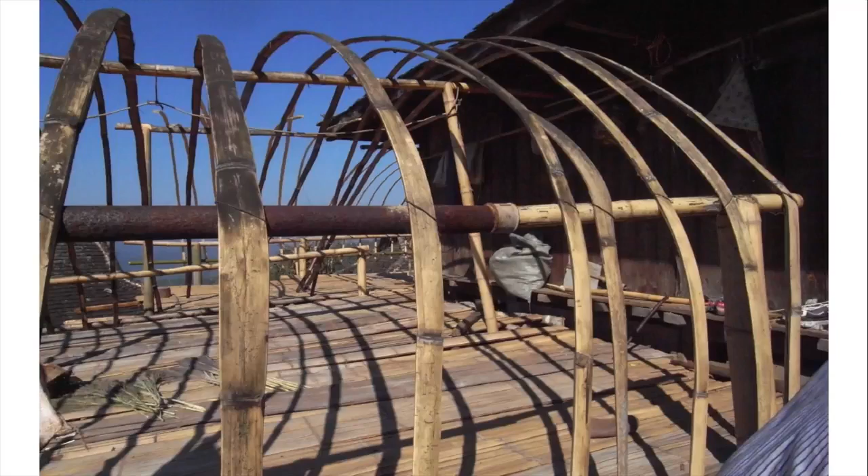That cladding surface there is actually a bamboo that's been split and fanned out. A close-up of the bamboo. At the back, this is the peg sort of structure through. And this is one of the balconies that you would come out into a sun deck. Those decks, the floor is very uneven, and that's only just a small thin layer of bamboo to step out onto. So it's a good thing these people are quite light.

This is a flooring for the hotel, woven bamboo again. A preparation of baijiu, I guess. They're the gourds in the area. The construction of that deck, you can see it's pretty light. That's the hay. These are the trees in the area. It's very similar to Avatar. The trees' roots just go on forever and sometimes stretch across the road.

Outdoor living is very simple, quite beautiful, just raw, easy lifestyle there. They do have issues of alcoholism, and it's in the Golden Triangle. It used to be the old Golden Triangle, so there's some drug issues too. But

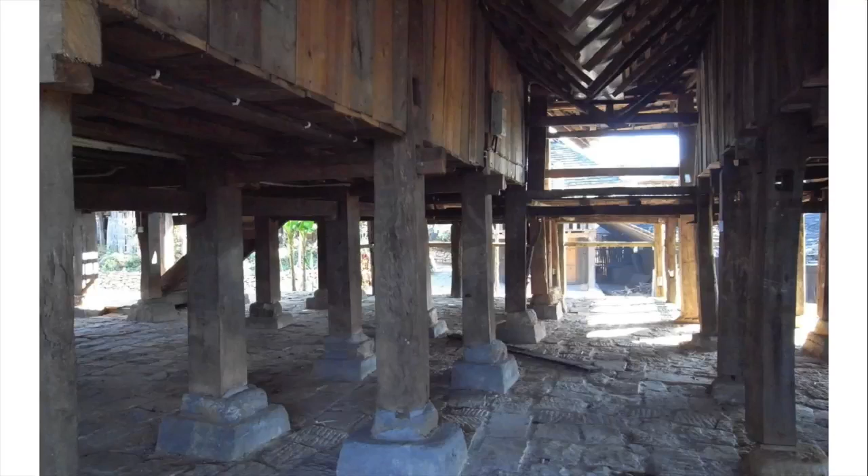So one of the things that we felt about the Wa people was that they're facing the sort of issues that the Aboriginal people are here in Australia, and that they're getting a little bit railroaded by the majority people, the Han people in China, and people are coming in and telling them what they should be doing, and you see that there's a high level actually of alcoholism and poor health. The villages, if you go far enough into the hinterland, are very poor.

Our pictures are maybe romanticising a little bit what they have, but the poorest are dirt poor. It happens that they're in a pretty good climate, so shelter from the rain is the main thing. Heating and cooling is not such a problem.

But anyway, so coming from Australia, we felt this strong, if you like, affinity with them, and we were hoping not to participate in the exploitation of their culture or the bamboozlement of their culture, and often that is happening.

Another sad reality for the area is a lot of the culturally specific places of significance for the tribes are being taken for hotel developments and other residential repurposing, and the locals are going in for what they see as the last days enjoying the site before it's privatised.

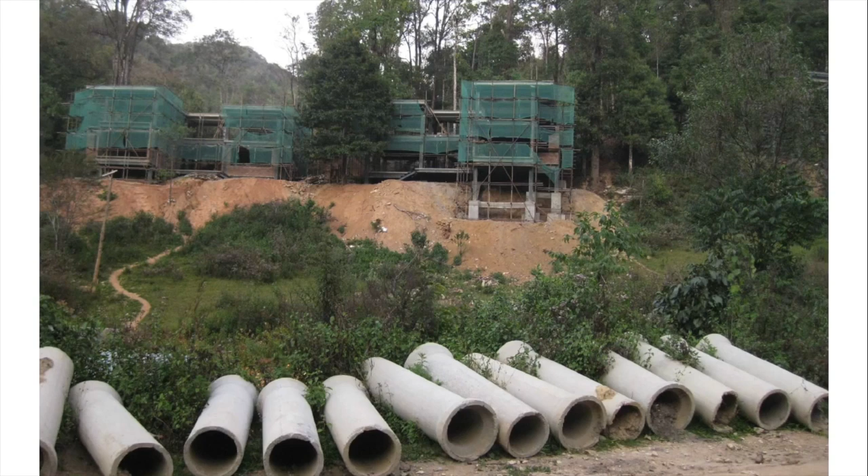And it's very sad to see their way of taking over the site is to, not intentionally trash it, but they have a difficulty understanding the issues of pollution and rubbish. And if you think of America back in the 60s, Yunnan is undergoing the same sort of adjustments to their society.

Not long ago, they didn't have any plastic bottles and other snack food and waste products that wouldn't degrade naturally. If we were walking along the road, there'd be a guy selling a kind of mushroom mobile on the street that's just basically threaded mushrooms held together by a stick. There's no plastic bag, and this sort of hyper-modernisation is a little bit difficult to deal with, and I think the China government is eventually going to come around to the issue of recycling, but it will take some time.

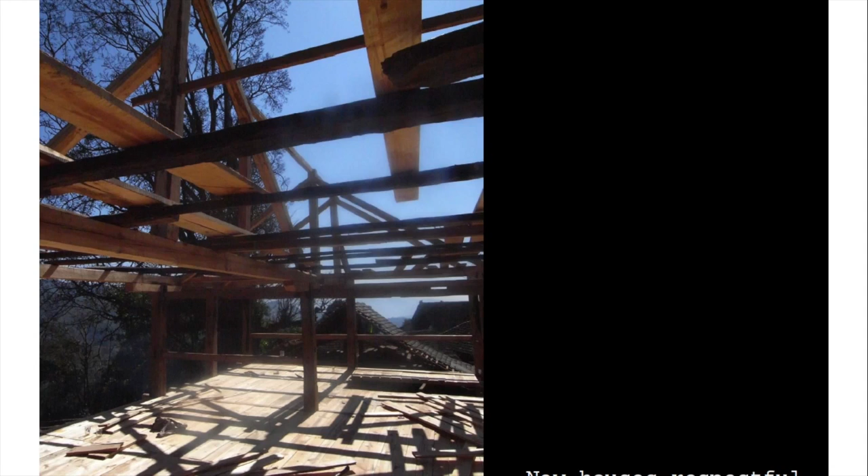One of the interesting things about working in a place like this, and with the idea that we're trying to find a genuine Wa tradition, is that we weren't there for long enough, and what we saw, what we were taken to, were often not Wa buildings, and there are about six different ethnic groups in this particular area. And actually over time, in the last maybe 20 or 30 years, their buildings have started to look similar.

So it is a real issue, with that sort of intent of trying to be genuine, how you can sort out what makes the Wa tradition different from the Dai tradition, different from the Bulang tradition, or whoever else happens to be around, and they fuse together. As Sara said, the roofs used to all be thatched with rice, the leftover husks from rice, but all of that's changed, and very few of them now are doing it that way.

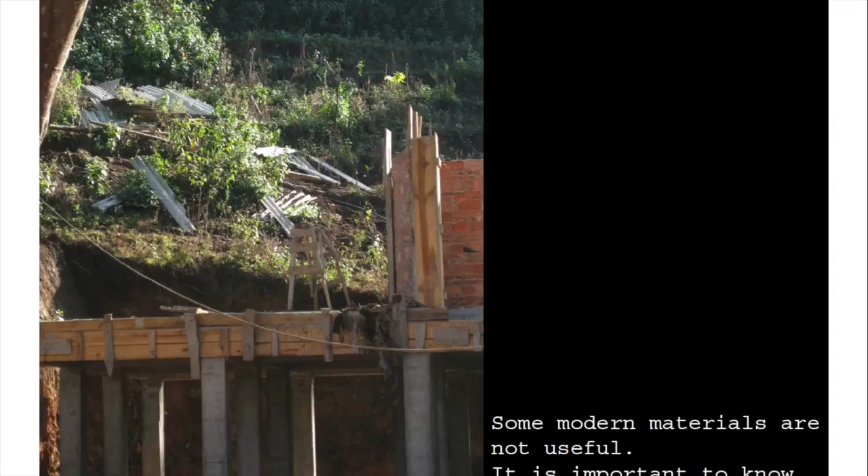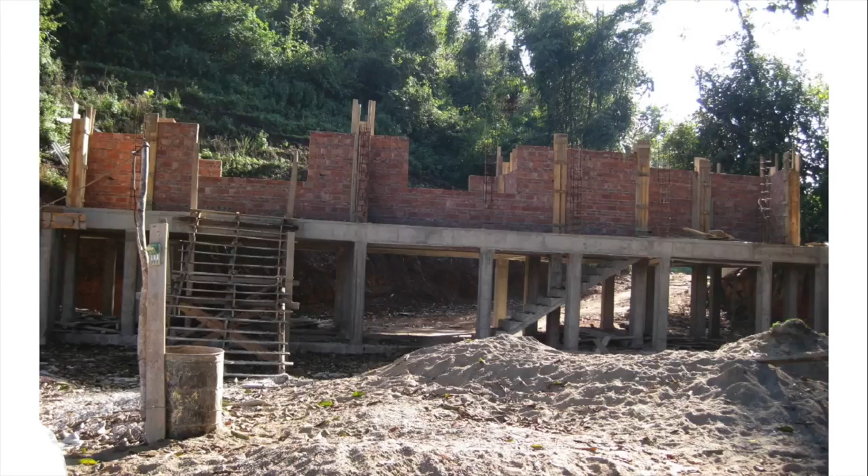But the government has come up with this great idea of using pressed aluminium pieces about that long that have fingers on them, and if you lay them over the top, they look from a far distance like an aluminium copy of a thatched roof. They look pretty shitty. That's not the way we see forward. It's better to accept that there needs to be change in that, and try and keep the substance, rather than trying to ape something that can't be aped unless you actually do it as thatch.

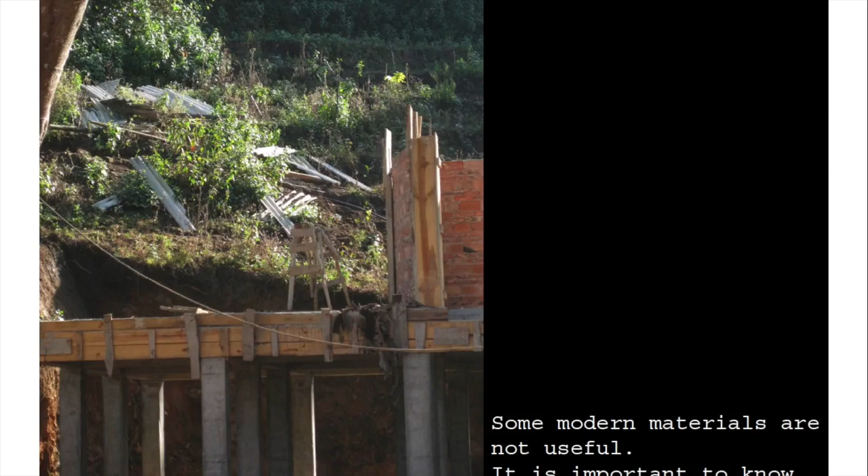These pictures here are trying to illustrate some asbestos problems. They're still digging asbestos in Yunnan because the government makes a lot of money from it, so they're not going to stop. And we tried to send out some information to the client to educate the locals on the dangers of asbestos, and it's a very difficult and tricky issue because the government is so interconnected with all the developments, and they have their industry to support themselves. So in many ways it's going to be tricky to try to curb the government's enthusiasm for making money.

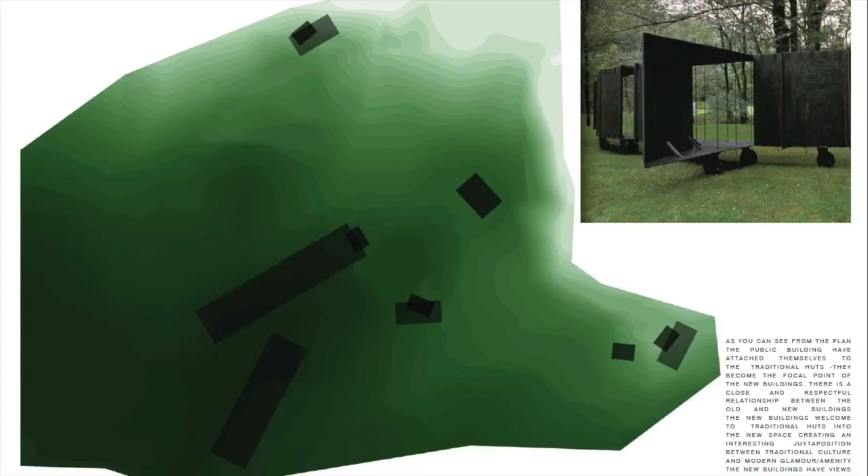And these were the original council buildings that were falling down, unfortunately, and had a lot of timber rot in them. Our intention was to keep some of them and add to that, but it was difficult to convince the government and the client to do that because the buildings were in such bad condition. But we borrowed from the language to recreate them.

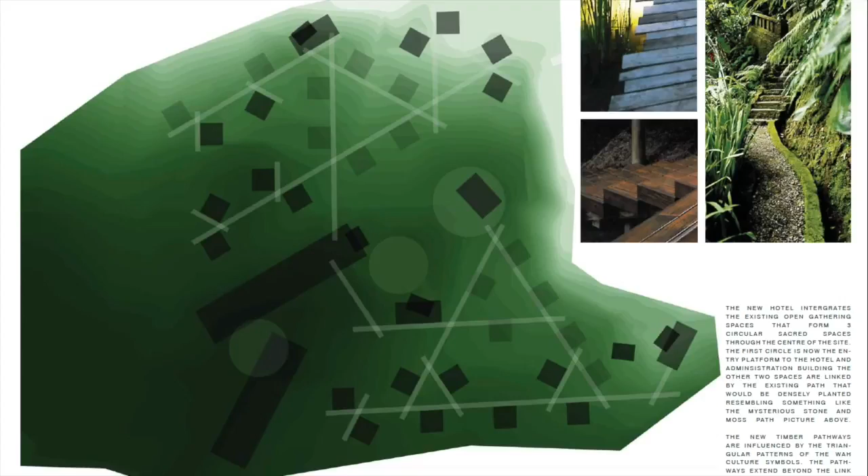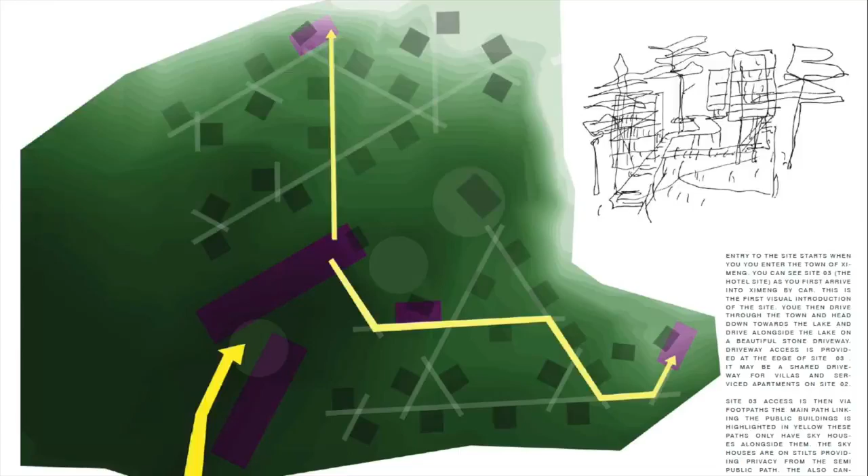So the positioning of these huts is basically a kind of treehouse aesthetic, so pass through the landscape to individual houses and allow the landscape to run underneath those houses up on poles, as you saw through the village, and be connected through the main buildings, but also be part of the landscape and looking through the trees at all times. This was a very early scheme, and it had multiple iterations, eventually found its form.

This is an entry into what we conceived as the village square, and is in one of the main corridor buildings to the left, across the creek there. Water is very, very important to Chinese. It's a symbol of wealth and prosperity, so there had to be a bridge building. And also the gate building through to kind of formalise the square arrangement to give people that sense of security

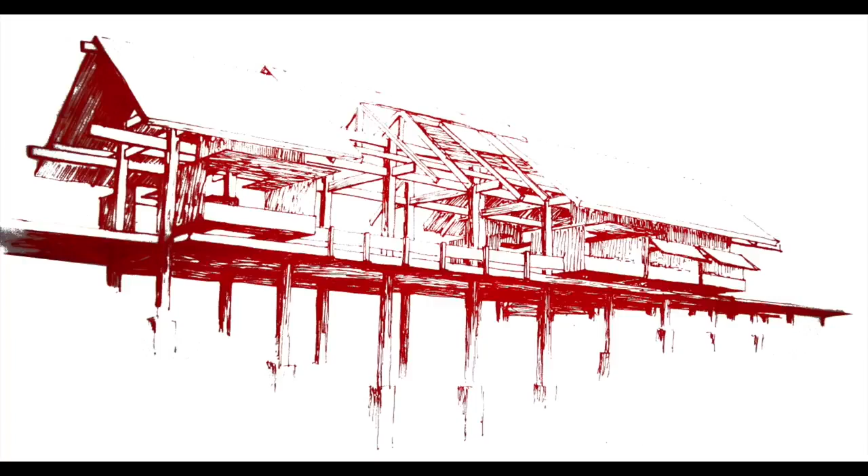This is the corridor building across the creek there. It's all timber construction, borrowing from the Wa language that's set up. A lot of the through beams through the columns are established as a modern sort of language. That's the gatehouse coming through. This is the meeting hall.

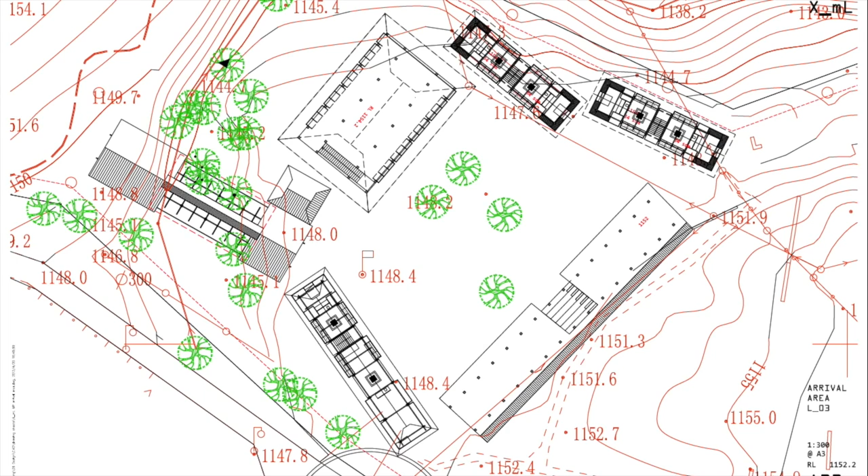So just going back to this is the arrival point around here, and the buildings are deliberately organised to form like a village gathering place and a place for ceremonies. So as Sara was referring to before, each year they pull a log along, which has religious significance, and they kill a chicken, and they pull it through the town. It's become a tourist attraction now.

Instead of happening once a year, it happens every feast day, or whenever the Han Chinese are down in sufficient numbers, they organise another log to be pulled along. But they usually use the same log now. There's too many trees. Yeah. Don't worry about the trees. It's the same log. But we organised this to save all of the trees.

One of the features of this, which is not exactly architecture, but all of the trees of any significance were kept all over the site, and that was possibly one of our greatest victories in this project, to the point where they are now saying they see this as a big thing for themselves, and in fact are saying it was their idea all along, which is good.

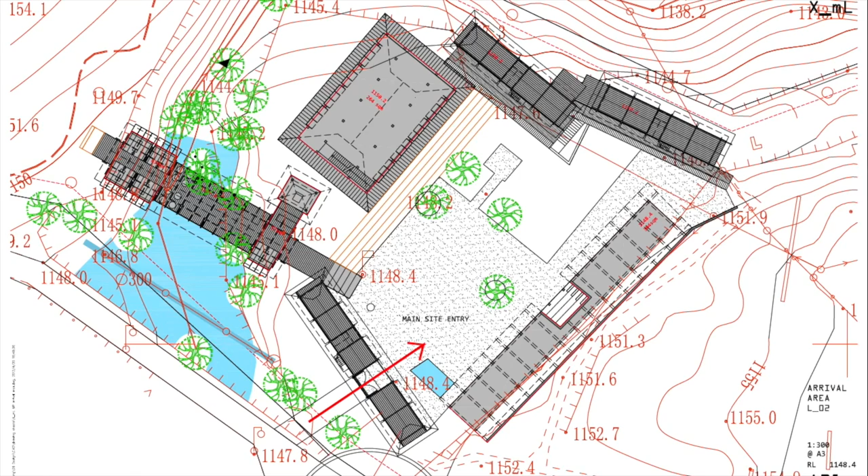So these are the buildings that ring around and give the scale to this central space. We also have the town not far away. This is a very heavily forested site, but it's not that far from the town. And so we organised the buildings in such a way that they would shield the view, because it's supposed to be the feeling that you're a long way away, that you're in the countryside, and unfortunately the sounds do get here, but the building mass has made it feel quite isolated.

And the landscape, we wanted to introduce the rice paddies of the area, which are so prominent in the landscape, as well as the tea trees. And of course, having said that they have to have rice paddies, that means you have to farm them. So we got involved in that as well. This is the fireplace villa, which is perhaps the closest building towards the Wa aesthetic on site.

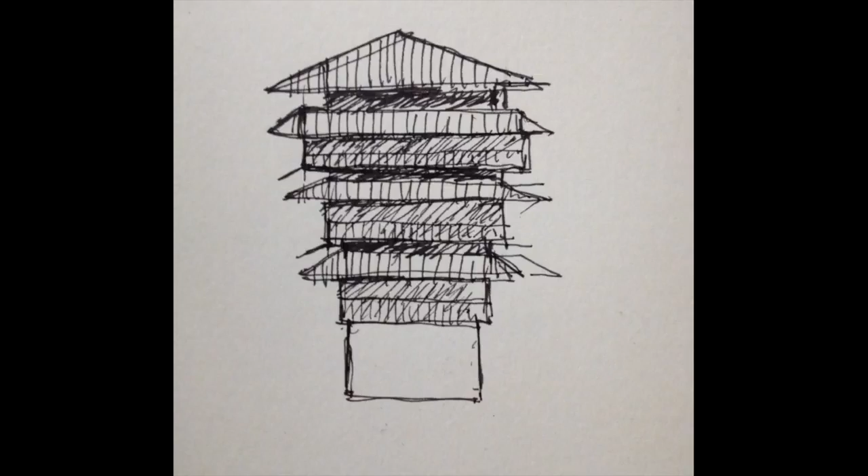It rains a lot, and we don't do pitched roofs very often, but we recognise that a pitched roof was the appropriate thing to do here, particularly for a tall building. The top floors are hanging out, the lower floors go back in, so that if you're using bamboo on the outside, which was our intention, the water doesn't get on the bamboo, doesn't rot it, and when it rains, it is torrential rain.

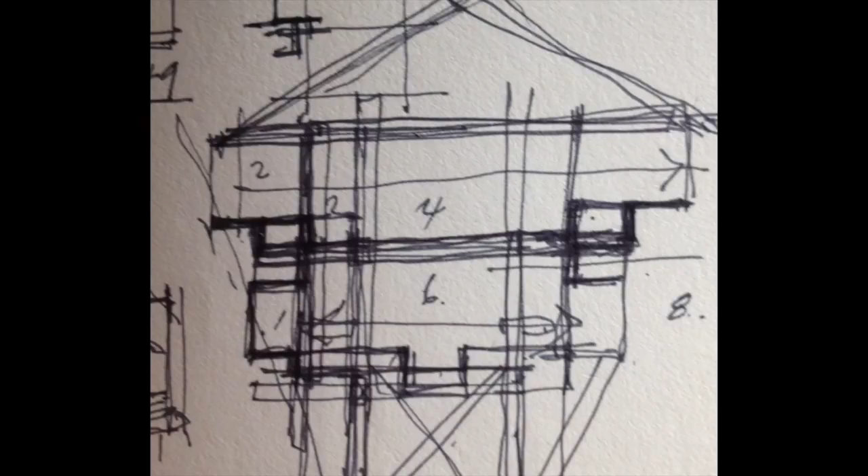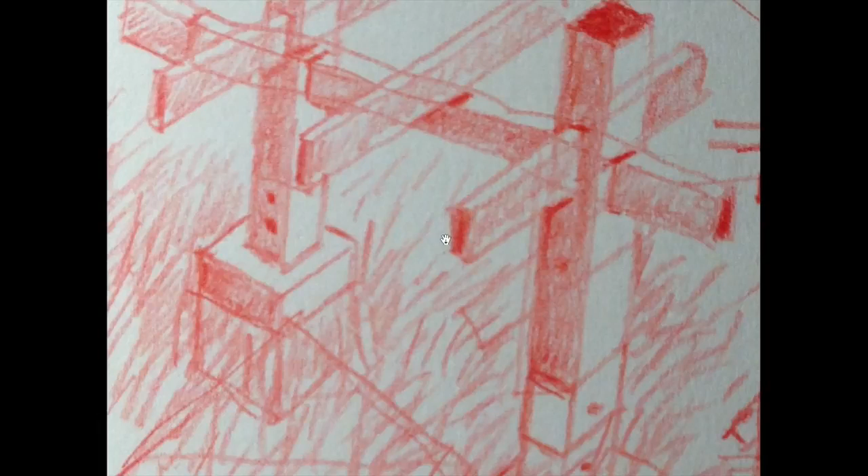Monsoon. So it has that sort of stepping down feeling, depending on how tall it is. The structure we really loved.

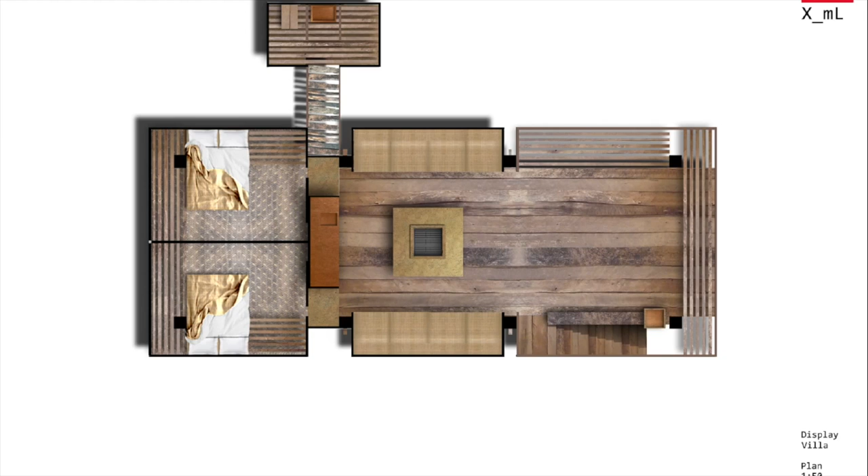This is a rendered plan with the fireplace in the middle and the beds to the outside, and an almost outdoor shower, and the seating base that you could use as sleeping single beds if you wanted to, and a big outdoor room with the wash basin outside. So connection to the outdoors was critical.

This is a small render of the space. I hope you can see the reference to the local village. That's the fireplace. And normally you would hang things to, cooking utensils and whatever, but if you were smoking something like an animal or a pig or smaller perhaps than a pig, you would put it up there, and you would sit around.

This is a little bit more deluxe than the basic at-home version, because normally you're sitting on little stools around the fireplace, and this one has a place where you can eat around it.

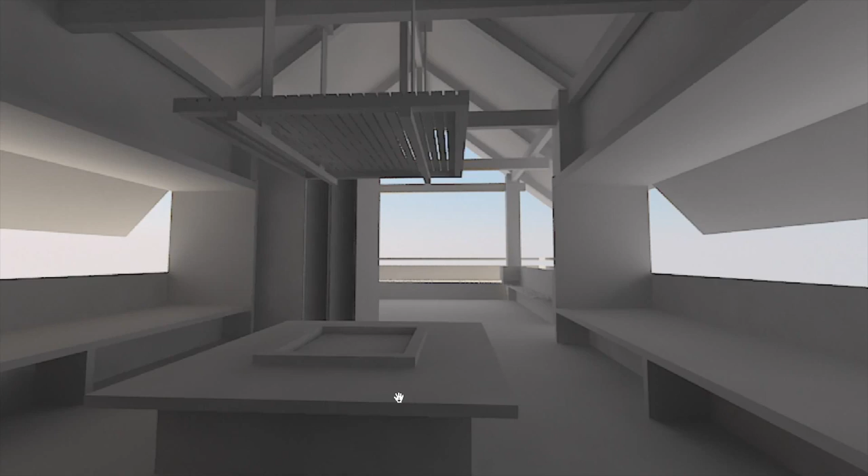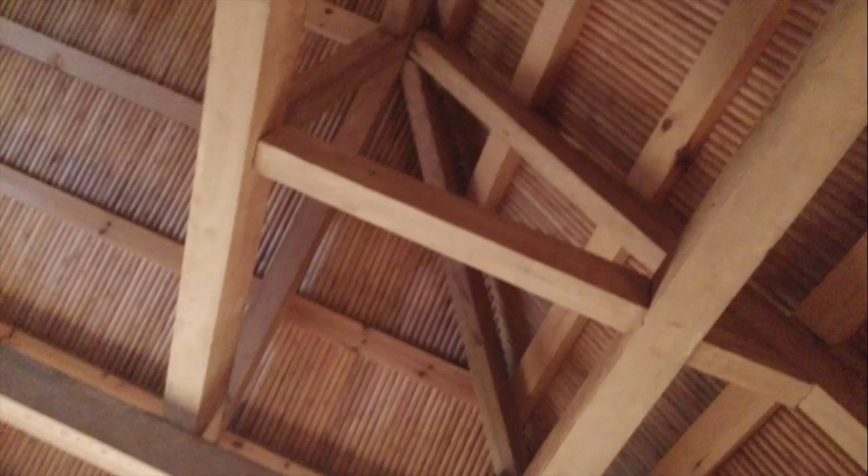Next project. So one of the things when we did these drawings as a prototype, we arrived down on the site and found that, it was a design that was meant to be a prototype, and we go down there and they've built it. They've changed quite a few things. But one of the things that they did was get these big logs, and they set up a sawmill on the site, and they were cutting them, and they were putting them up pretty much straight away in green condition.

Or if they weren't ready, they were lying them on the ground willy-nilly, all over the place, and they were becoming pretzels. So you have this beautiful timber, and it's about 240 square. It's drying badly, they're not treating it properly. The client and the builders have gone out and found people who don't really use timber that much and don't have that much of a tradition in it. Just down the road was a sawmill where they could have bought the timber, and they know how to look after it, but they didn't use them.

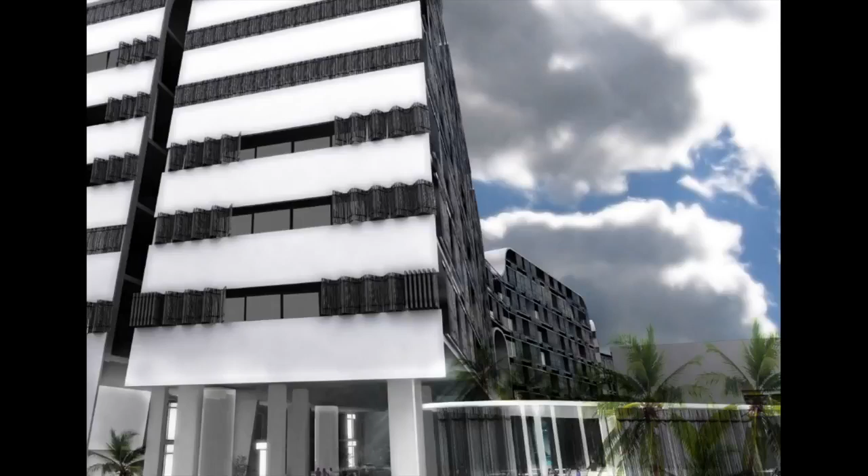We wanted the apartments, as much as possible, to try to reconnect with the landscape. So the towers have planted balconies and outdoor rooms, green roof gardens on the townhouses in front, and natural ventilation as a priority to take advantage of the natural sea breezes of the area.

This is a later version. It's not what we started off with. This one is the second version, where there were many versions because there were lots of people in the client group that were piping up at various times. It's like a political party with their factions, and some would win, get ascendancy, and then another group would get ascendancy. So it was an interesting process.

With many facade ideas. So this one was looking at a green facade, like literally having a green trellis across the building with planters that would creep across. And then there was a perforated green screen for the building to filter the harsh tropical sunlight. That's the bamboo screen facade.

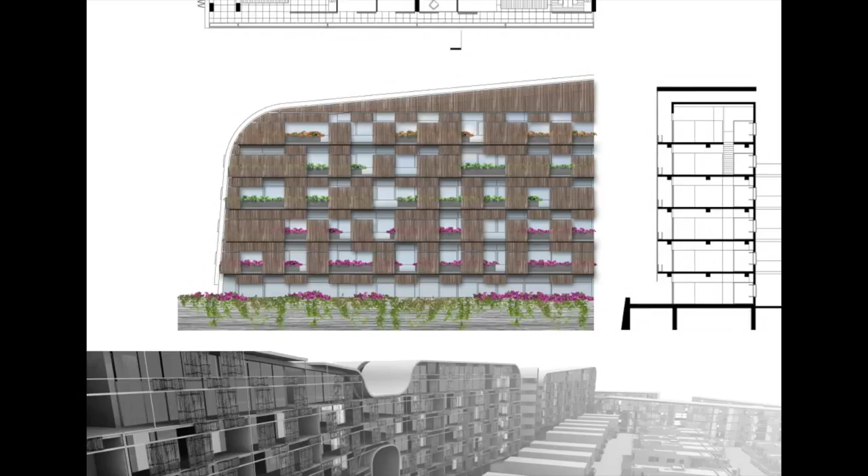You can see the depth of the building is utilising these apartments to take advantage of the natural sea breezes. They're only one apartment wide, so that allows you to naturally ventilate each house individually, and they're connected to a series of bridge links and vertical circulation points.

The standard setup in China is that you'd run an awful, stinking hot corridor along the back side of the development, with one core every 20 apartments. That's probably a bit of an exaggeration, but the cores would be hot spaces. You wouldn't be able to naturally ventilate your house because the breeze couldn't get through the apartment. So our strategy was to keep the houses narrow, allow the breeze to blow through, and make the core circulation space external.

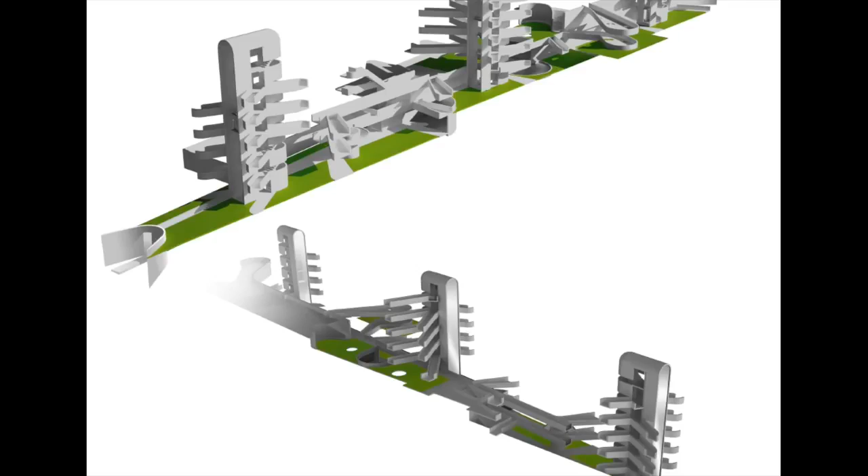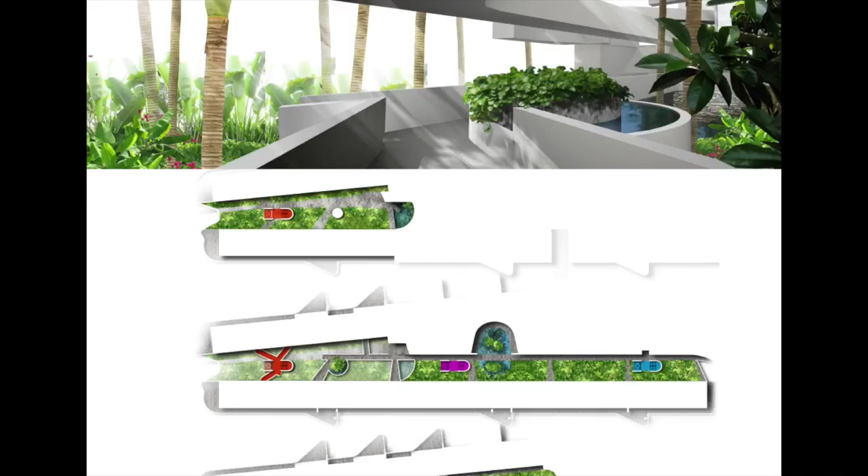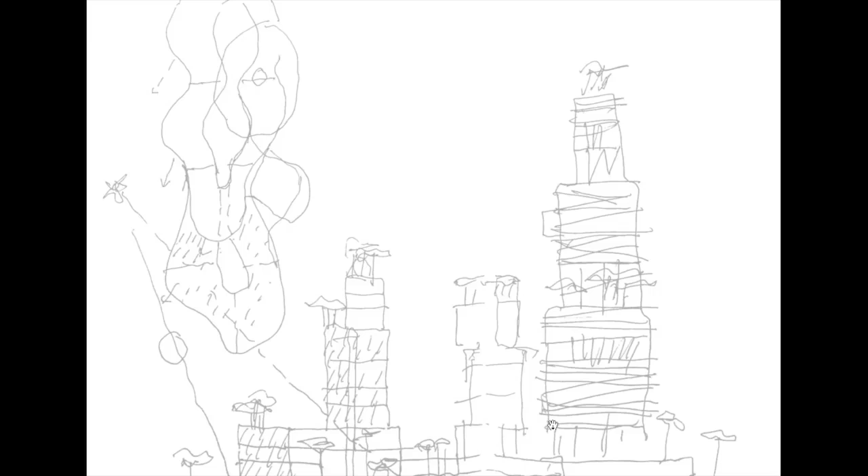These are the vertical bridge circulation points, almost like a tree in themselves. This is the outdoor external vertical circulation garden, so you experience entering your house through a vertical garden. The apartments are in lines on either side of the garden.

Initial ideas of another adaptation of the building form, heading towards those towers shown in the first slide. At some point the people next door built up until this stage - there was a 10-storey height limit, which was why they were at maximum 10 stories high.

Then the people next door, all of a sudden, started building 30 and 40 stories high. Our clients said, 'Hang on, what's going on here? This was not part of the town planning guidelines.' So they approached the government and said, 'Can we do something like this?'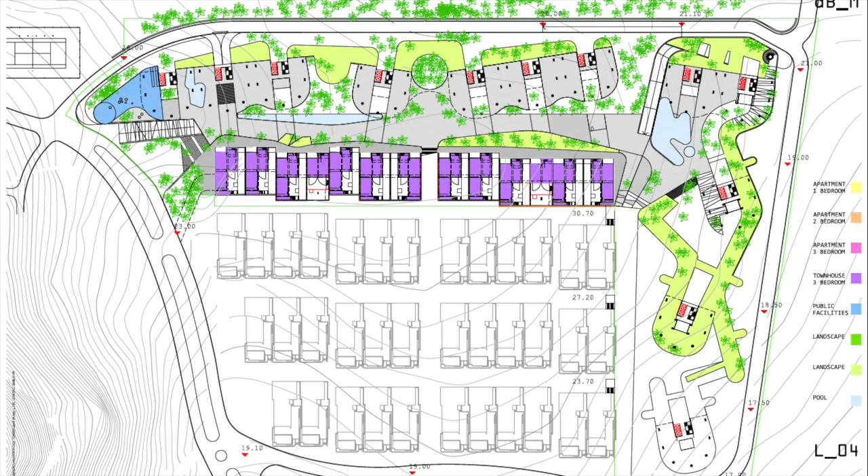This is the initial level 4 planning area. It's built on a fake hill, if you like - the sea level is further down south of this plan, and they've introduced a lot of sand to the site to create their own man-made hill, so they can build basements underneath the hill without claiming them on the GFA. It's an interesting system they've got going in China that makes things interesting to work in architecture.

These are more developed plans at a higher level, so you can see the apartments finding their true form, and the townhouses in front of them.

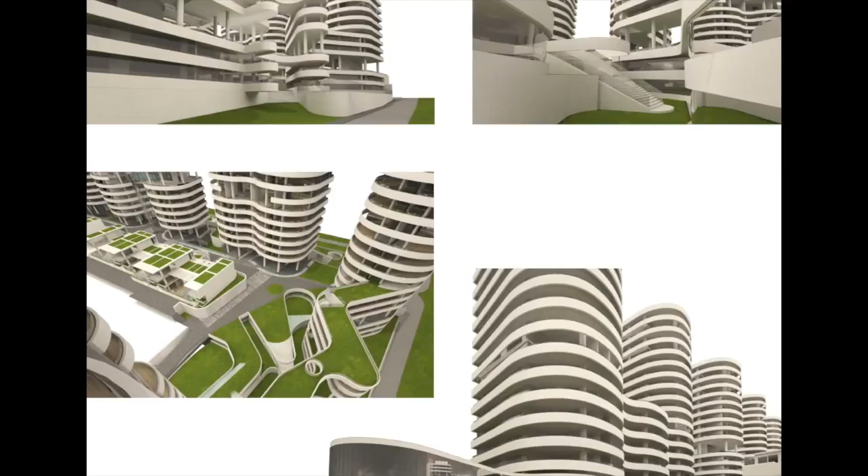There's a form study of the buildings, eventually finding those landscape planter balconies that also keep the sunshine directly off the glass facade of each house - shading the external perimeter and making those spaces quite livable inside. So you have a beachfront, fully operable facade, outdoor living rooms and the like to connect you to that perfect beach condition temperature.

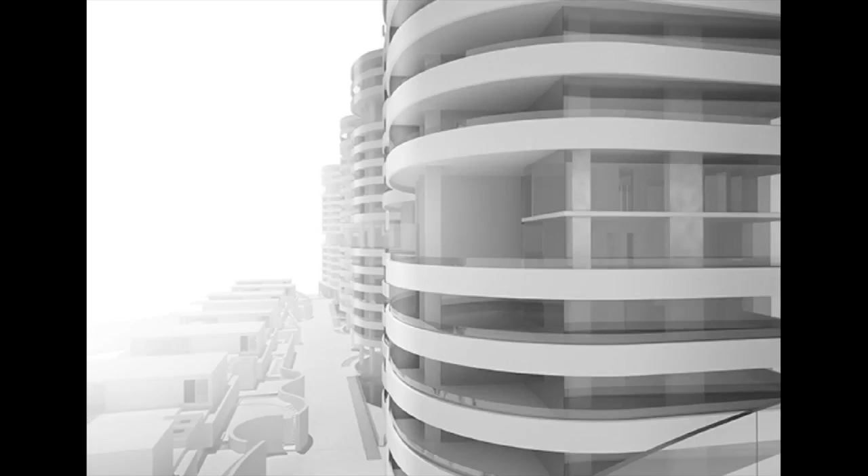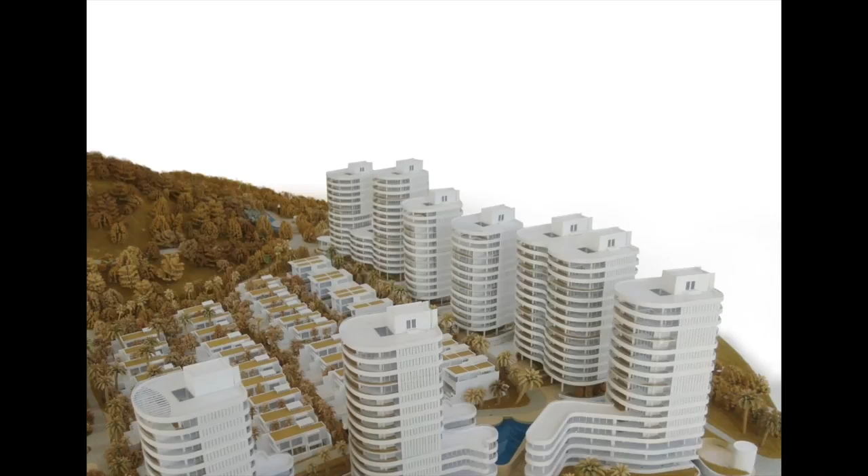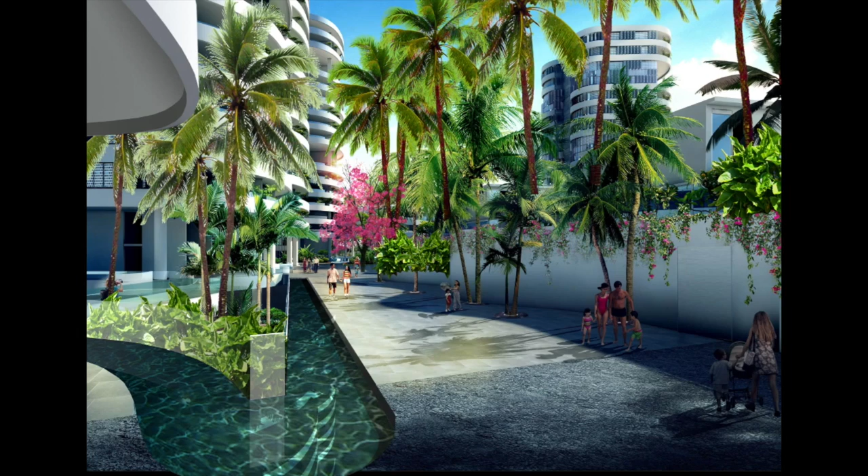A view from the balcony looking back along the apartments with those townhouses in front. The model shows walking up from the beach to your apartment. This scheme shows what were once bridge apartments through, and this is walking along the podium area with the townhouses to the right and the apartments to the left.

You can start to see a view from level 6. It isn't always 3 stories, it's 2 and 3, and you can always get a view from the 6th level down to the beach. This is an early version as well.

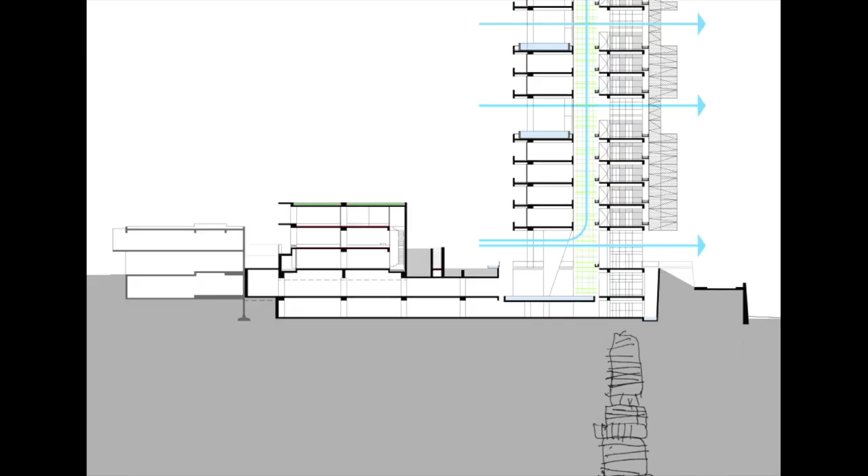Maybe it's a little bit higher than it ended up, but it has this internal atrium which is open to the bottom and the top and through, so that the air, using a Venturi effect, can suck air out of the core of the building and through the surrounding apartments. You can also see the natural ground line on the road there - imagine that line going down to the beach, all the sand that's been added to create basements out of the man-made hill, and everybody gets a view that way, so it sort of works.

So these are a couple of versions of this apartment tower. This is the atrium, and this part with the lifts and the stair is also open.

That actually had some benefits because an open space doesn't count as part of the gross floor area of the building. It only counted as 50%, which means the developer can put more apartments, more space that they can sell.

We also have pretty big balconies. These aren't little balconies - they're conceived of as the primary living areas of the place, and the doors and windows push right back so there's very little obstruction between interior and exterior. That also has advantages for the developer, because this is nominally an apartment of say 100 square metres of internal area, but it has about 30 or 40 square metres of usable balcony, and all the windows open up so each room steals more visual and functional space.

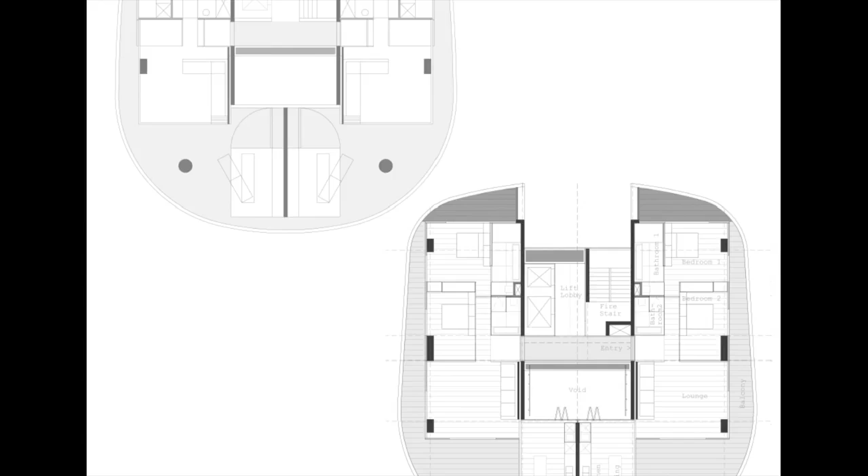This is inside one of the show display apartments. You get that sense of what it's like to be in this planted balcony wraparound space, shaded from the sunlight, but also have your garden on the 10th floor looking out to the view of the bay beyond.

We pushed very hard to have screened spaces. This room on the left side of the lounge was going to be potentially a bedroom or potentially a tatami tea room facility, but it has the capacity to be a 2-bedroom house or a very generous 1-bedroom apartment.

The interior decoration is not ours - don't blame us for that. Why we're showing this is because even though they didn't stick to our plan, it was flexible enough for other people to do their decorating and still work. It's not what we would have preferred, but it turned out okay, and it meant that what was the theory behind it actually worked quite well.

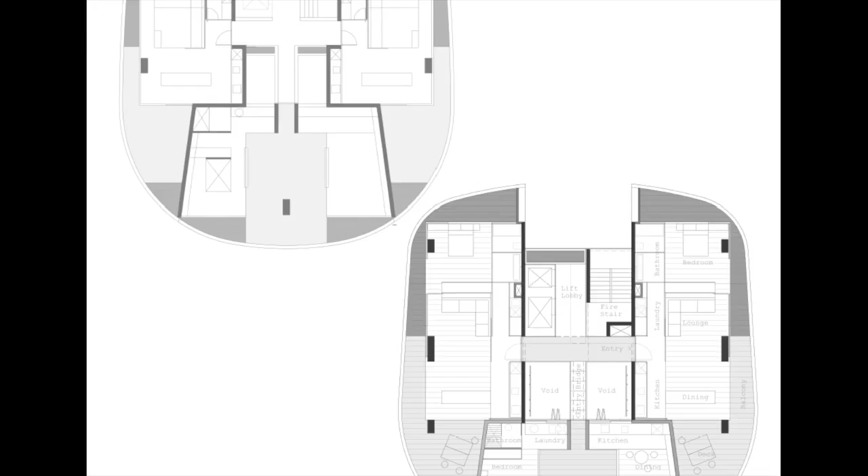The apartments behind follow a similar strategy to the pictures you saw before. This is apartment 1B at the front, so planters both sides and the external living space in the middle, and potentially you could have a fold-out bed on the other side as well, but it's a very ambiguous space - you walk through a corridor and pop out to the outside of the house before you've even gone into the house. So the view is a very dramatic effect.

This is outside balcony, so it counts as 50% of the space. It's not that clear here, but there are walls that push back behind the joinery, so the kitchen and laundry become part of the outside space, as in fact it all does. So it's either one slightly partitioned space, or these can be pulled out so they're all individual spaces.

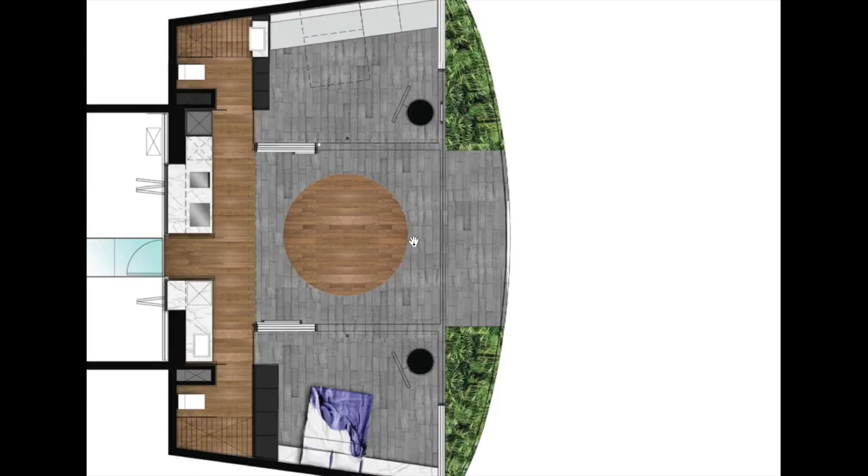Again, this isn't our design, the interiors - sorry. The planter through, the balcony in the trees.

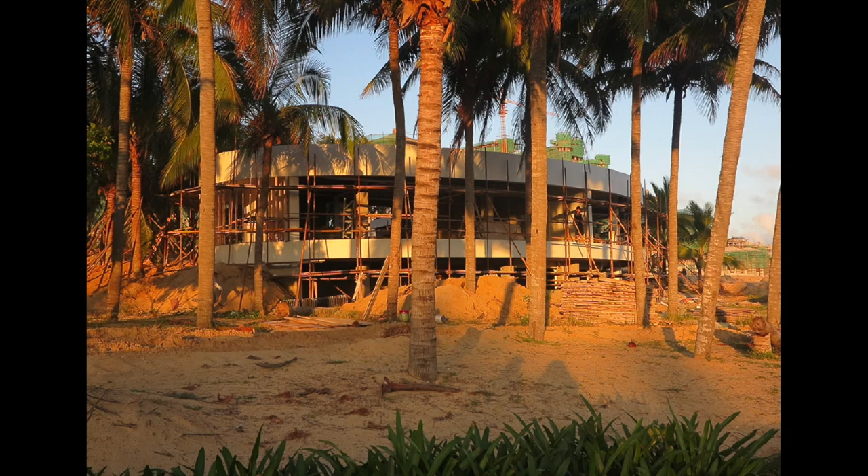The sales display suite being constructed in the early days, then finished. So those apartment interiors were in this purpose-built display structure.

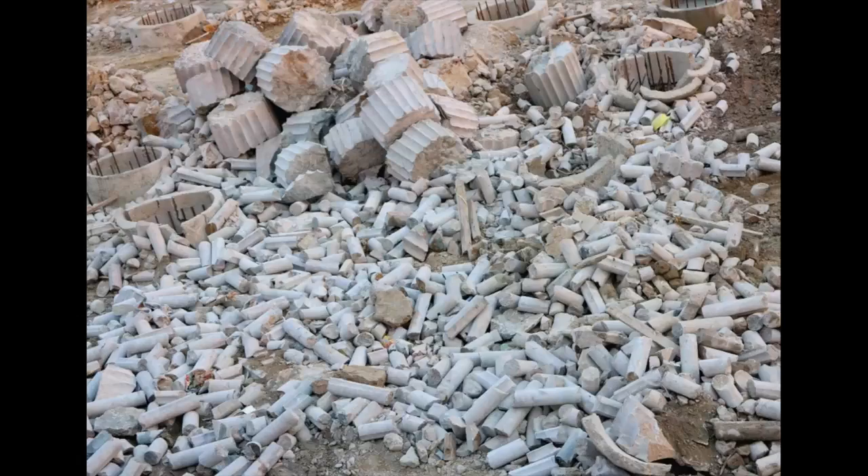This is the beginnings of the construction of the actual apartments. When we came on site, we thought it looked more like the Colosseum wreckage - they're actually core drilling these footings, and that's the effect of those sort of Doric columns. But it's very hand done.

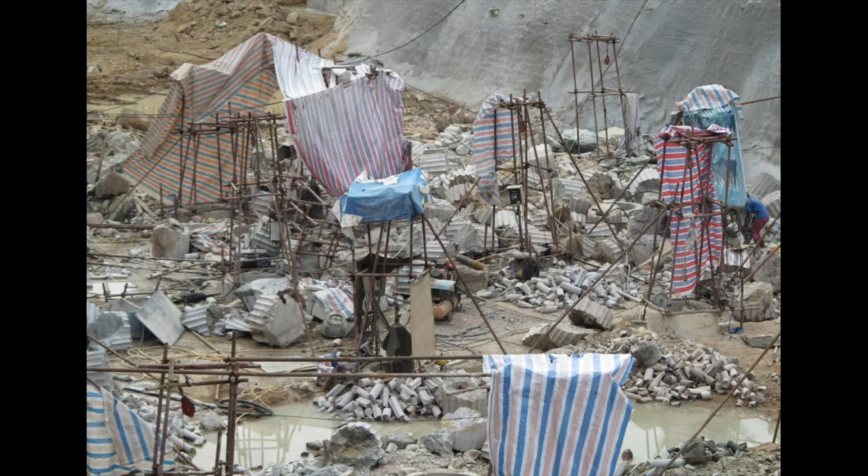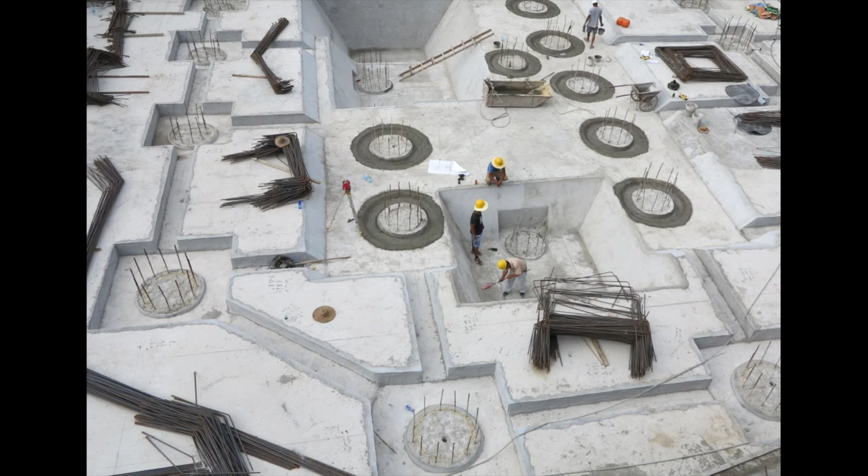This is an interesting combination of almost old world meets new world in China. You just never really expect both conditions to be running simultaneously, because next door you can see the sort of Star Wars style construction happening on site at the same time, but the difference is fairly dynamic.

Soon the scaffolding will be removed. I'm told it's going to be the end of November, but we will wait and see.

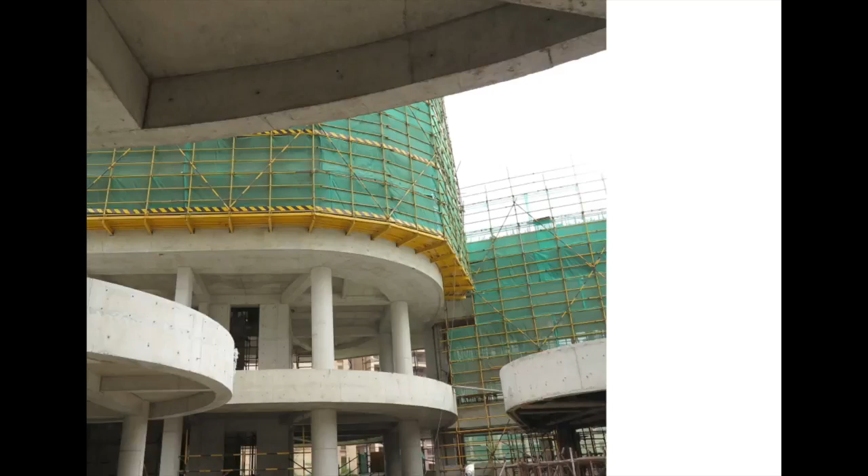This is part of the level 3 space with the level 4 in these ribbons of structure above, splitting apart to create this space. This is the tower.

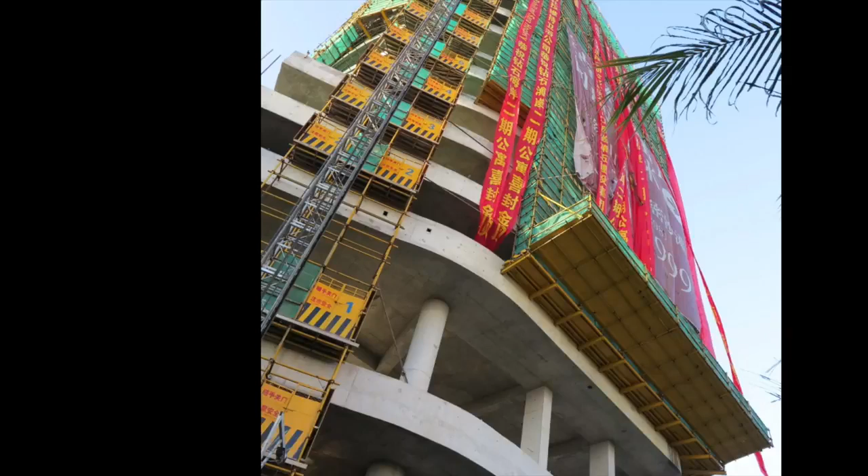When they got to the top of the tower, there's a bit of a ceremony that happens in China - they bring all the animals in, carve them up for the locals, and set off deafening fireworks. Michael set them off actually, and that goes on for a while. I'm not sure why they did it in the daytime, because fireworks are so much better at nighttime, but they certainly had the same sound effect.

This is the level 3 retail area and car park adjacent, and you can see the building forms splitting off that level 4 area to rip apart the form and bring light down to the lower areas of the building.

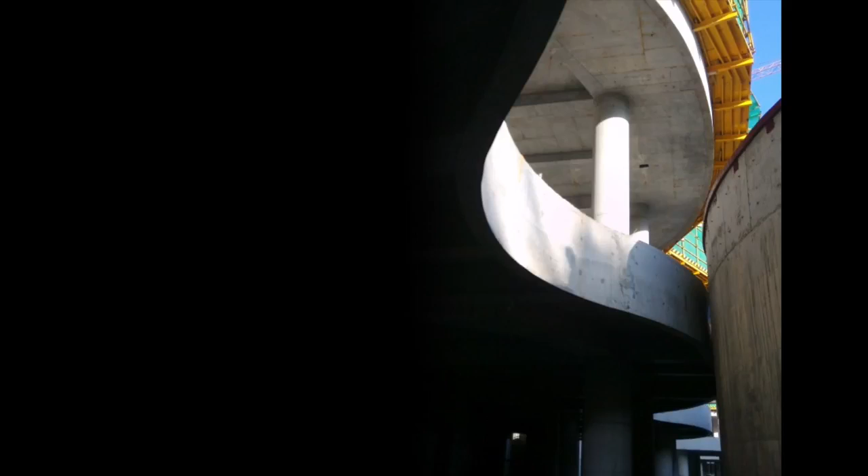That's the space we were in before. Michael's looking at it on site now, one of those sculptural spaces on the site.

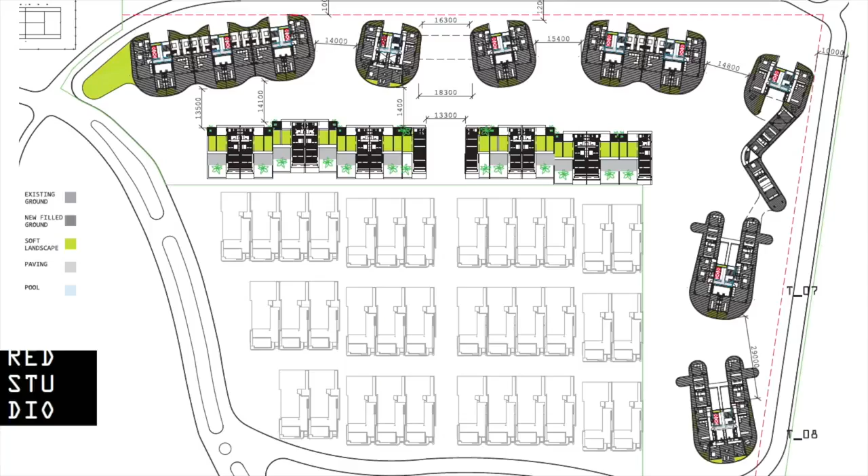And then this one's heading to the townhouses, which are the row houses in front, basically row 4. These ones here. Early render.

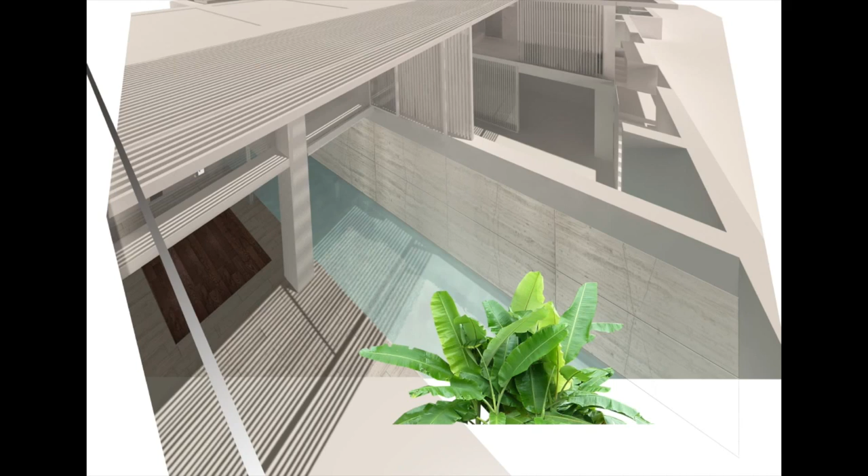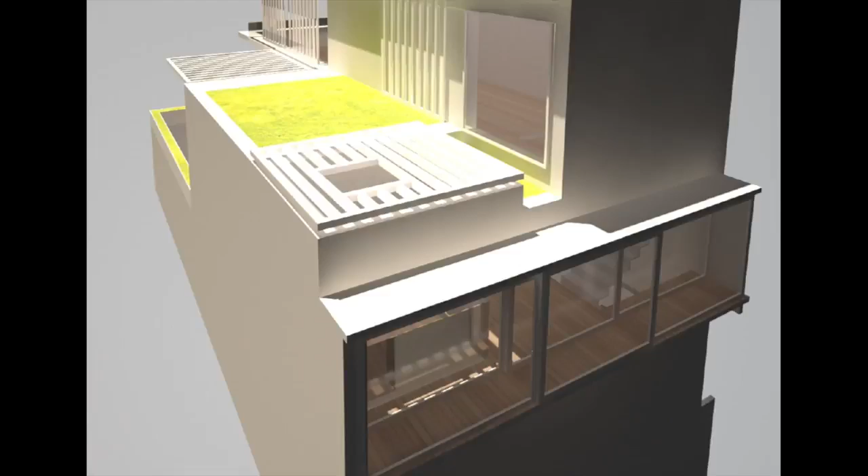The main strategy for the townhouses was all about shading, sun shading, and outdoor areas, and having a very strong connection to landscape throughout the building, so that landscape would actually come into the building. Lap pools would go into the house and around the house, and it's very difficult to define where the landscape ends and the house begins.

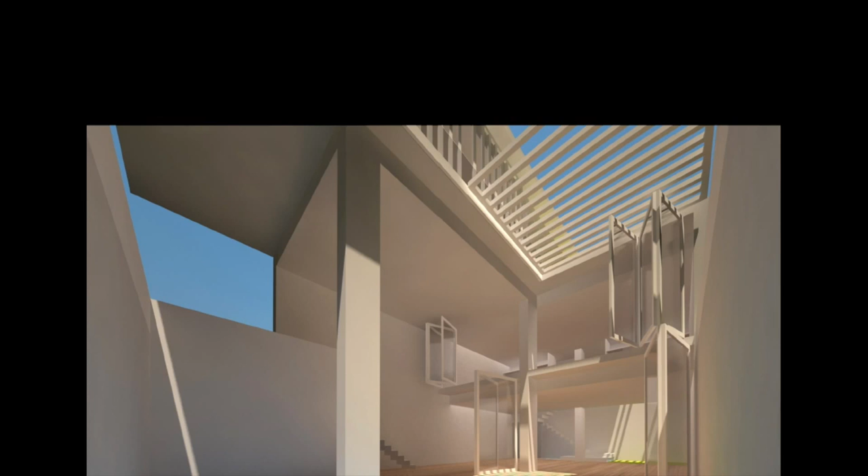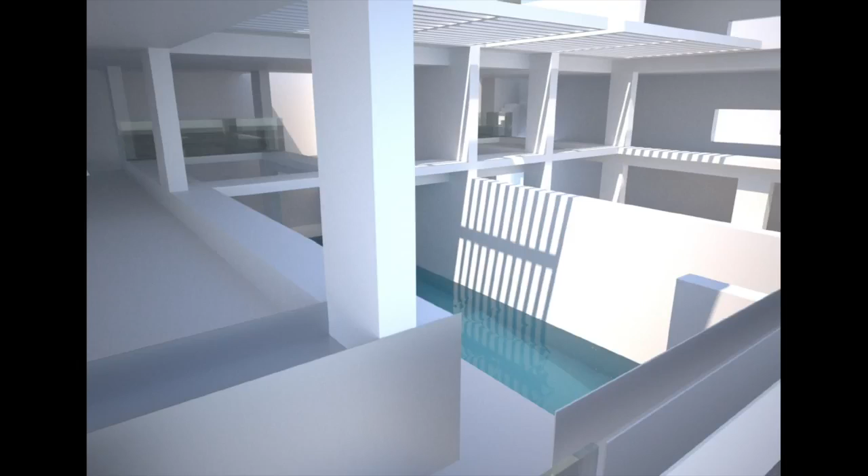The landscape is part of the houses, which is a Chinese tradition if you think of the old Suzhou houses. Courtyards, light wells, and a sculptural space really take care of the landscape and bring it into the house, which was important to us working in a tropical area where anything grows. So the space tried to adapt to work with that idea.

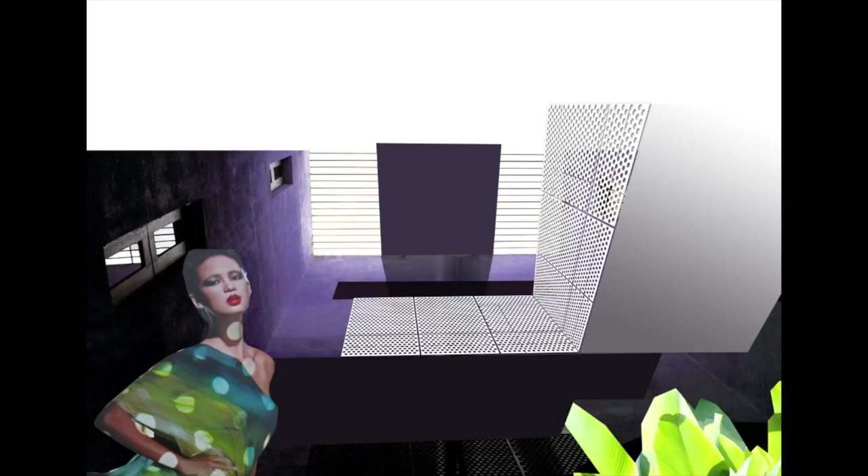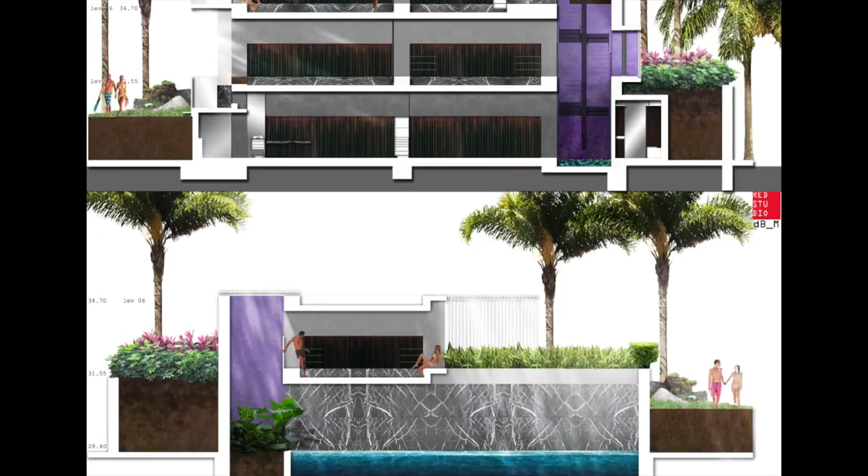Tropical, dark, purple spaces and landscaped three-dimensional gardens. This is the space - she's sitting on the yoga deck here, adjacent to the main stair, looking out over that green space. So this is here, well, a little bit behind, but in that location.

The whole building is about 30% outdoor space, and quite secure. One of the problems they were having dealing with villas was that the ones they'd already bought had people constantly going around attending to gardens, watering and weeding everything.

And if you happen to be hanging around sunning yourself naked or whatever, you're likely to have someone just walk out in front of you. So the security, in a resort you want to feel safe, secure, and private. A lot of our work in these smaller developments and also the apartments is to ensure that you feel private, that you can participate and take as many clothes off as you like, and no one will be there to look at you.

And also in a place like this, you could actually sleep outside without any fear that someone is going to attack you in the middle of the night. The Chinese are quite conscious of security, and there are security guards in most compounds, as there are in this one. But in this case, it was a key part of the design that they feel very secure, and that they allow the breezes to blow through - almost constant cooling breezes from the south through the building and out through the roof at the back and through this opening.

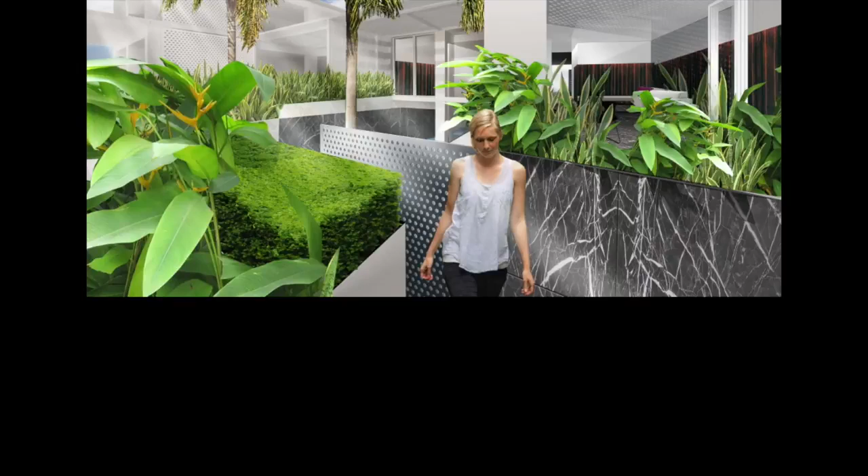This is a stair going down to the pool area, that pool beyond. You can see into one of the outdoor decks behind the planter. This is going into the bedroom area.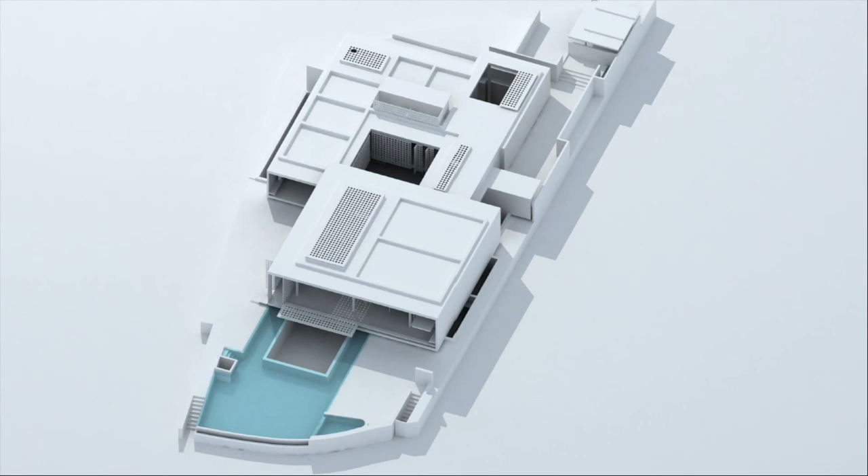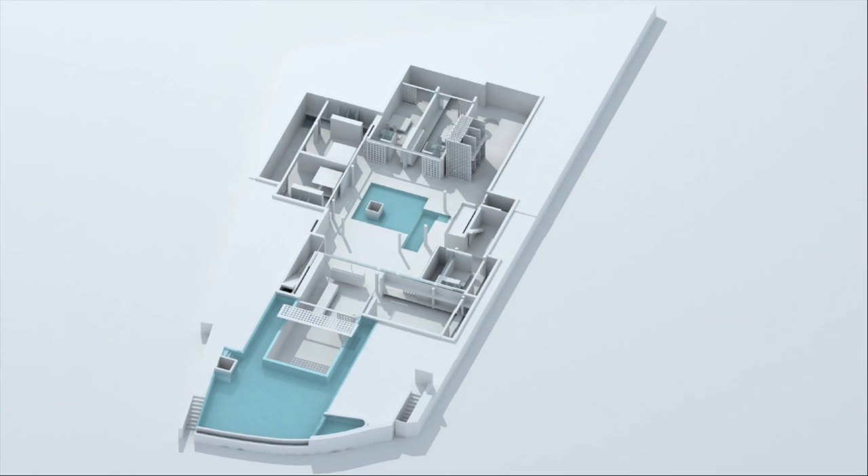So we'll just take you through the axo views of the house. Through the main space, it's conceived of as potentially 2 separate dwellings, but can be used as one. A 7-bedroom house with 2 living areas, 2 kitchens, and 2 pools, 2 spas actually. Yeah. So quite luxurious.

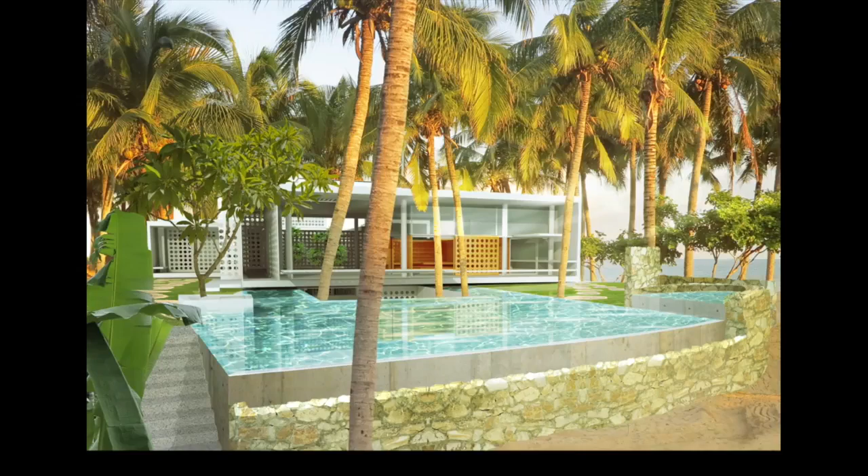This house is directly on the beachfront, in amongst the palm trees, and again the emphasis is on an outdoor room that allows the breezes to go through. Intensely screened, very many operable screens here to allow the tropical sun to maybe dapple the light through the house but not come in fully.

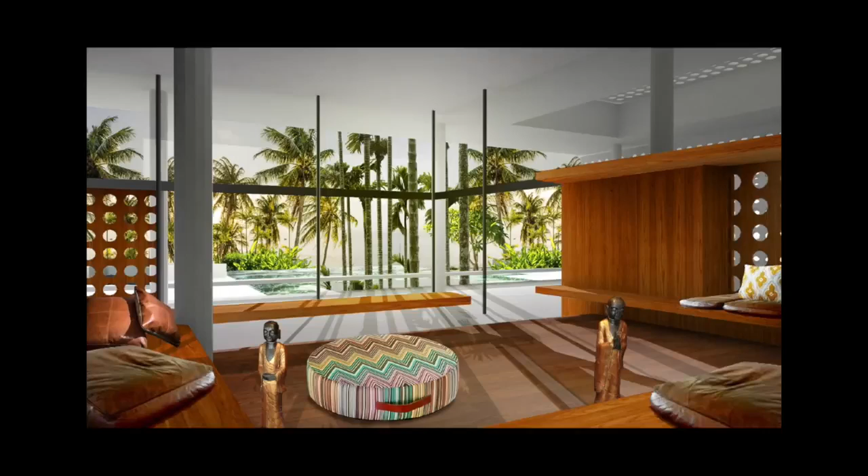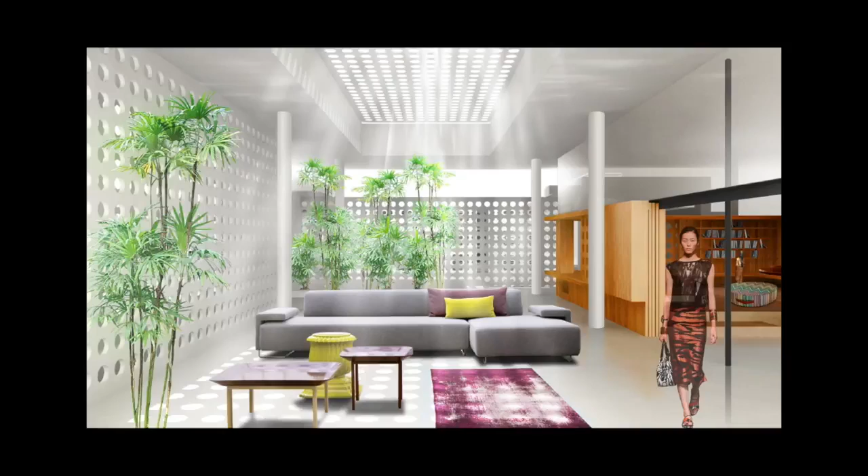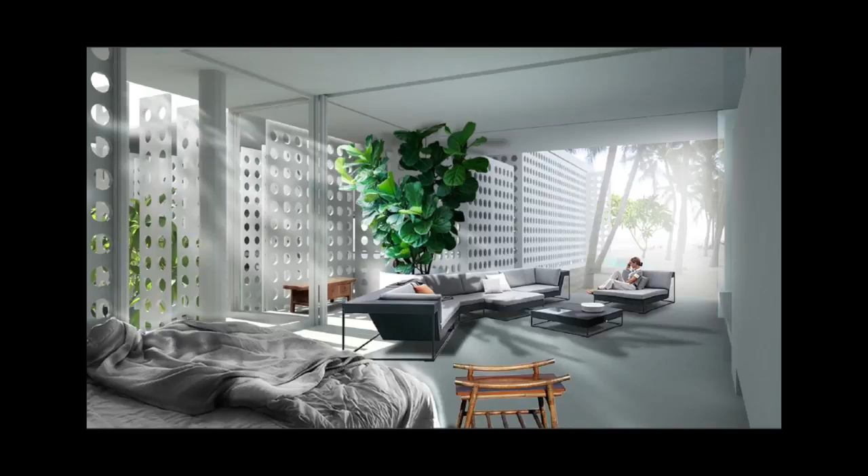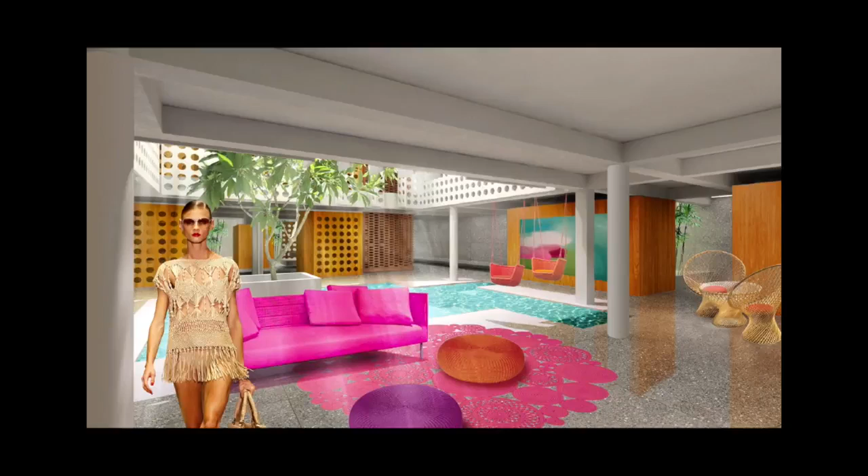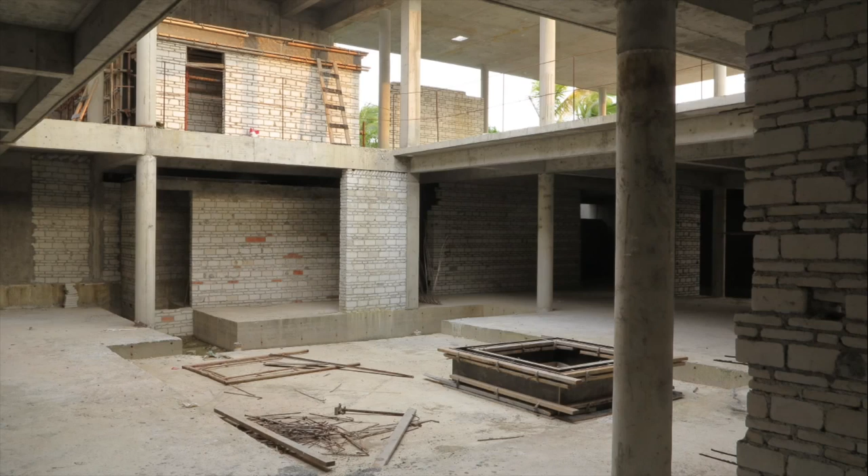And you can see to the left, that's the atrium screened idea of traditional Chinese aesthetic coming into a kind of more contemporary modern language. This is the atrium space in the middle of the house going down to the basement. This is down in the basement, an outdoor living room area with the pond in the middle of the house, letting the light through, but the tree sort of creates a more dappled lighting effect through the middle of the space.

This is the built reality of the space. So it's under construction at the moment. We hope that it will be fully finished soon, but there may be some changes. And that's the level 1 space looking down into what will be the atrium space of the basement below. And that's it. As you can see, the people who are going to live in this one are somewhat different to the people from Yunnan. It's a completely different market.

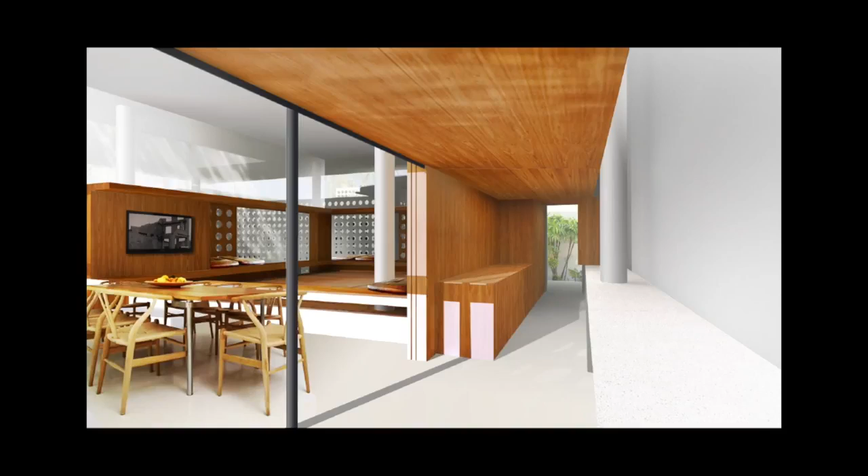What we are primarily trying to do here is respond to the climate, to reduce the need for air conditioning, to have the spaces open as much as possible. I guess the indoor-outdoor thing is a typical modernist pathway, but in this sort of climate, it makes so much sense. It actually makes sense everywhere, probably, but particularly in this. And the primary rooms actually haven't got walls around them, both upstairs and downstairs. The whole living and dining area in the basement is without walls.

There's a little problem with the climate, that every now and again there's a typhoon, and so the outdoor business has to be tempered with the idea that you have to nail your furniture down. But the overhangs are so big that the water won't get in to do any damage. If you keep furniture outside, you just have to bring it in at the appropriate time. That happens maybe twice a year. It's not too bad. It's fun, actually.